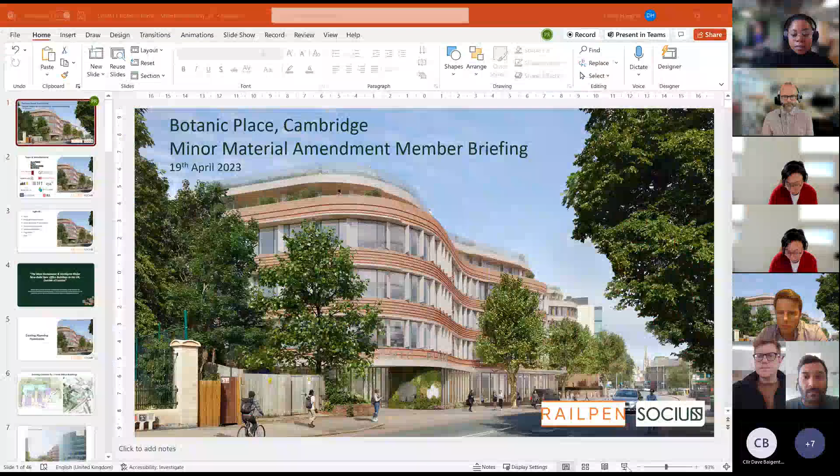Many thanks. This is to run through our proposed minor material amendment for the existing consent on Botanic Place. So here's the team.

We've obviously had a few introductions, you'll recognise a lot of the names there. Just to set the scene, Railpen acquired the site from Pace Investments in about September last year, so they're the investor going forward for this scheme, and as you might be aware, they are a pension fund.

They are here for the long term, so there's the justification for investment in good quality materials that stand the test of time, creation of a wonderful long-term sustainable community, and buildings that operate efficiently, because this is an asset for Railpen for the long term, for the income for their pension funds. And as I said earlier, Socius were appointed as their development manager to deliver this.

So just a recap on the existing planning permission. It's consent to retain the Flying Pig pub, illustrated on Hills Road, with a private garden, and essentially two new office buildings, Building B and Building C, alongside Building A, Botanic House, the existing Mills and Reeve building that's about 12 years old. That's staying very much as it is. The development site is here to the south of Botanic House, with a double basement and substantial car parking. You can see the ramp on the left-hand side, and a 3D stack there.

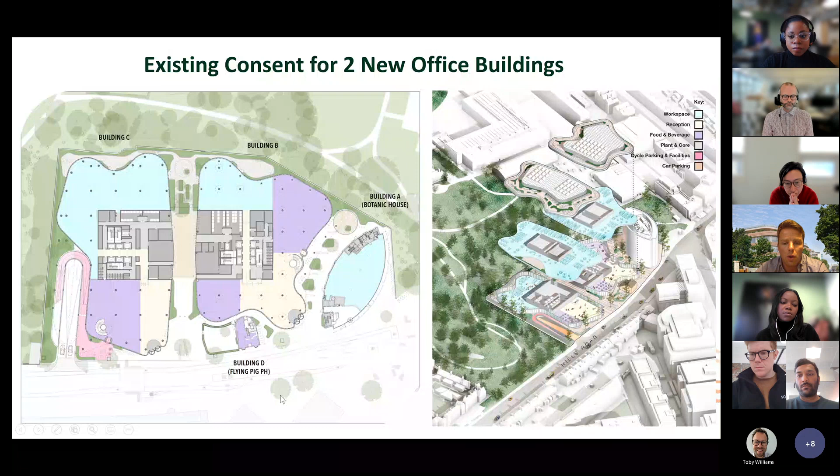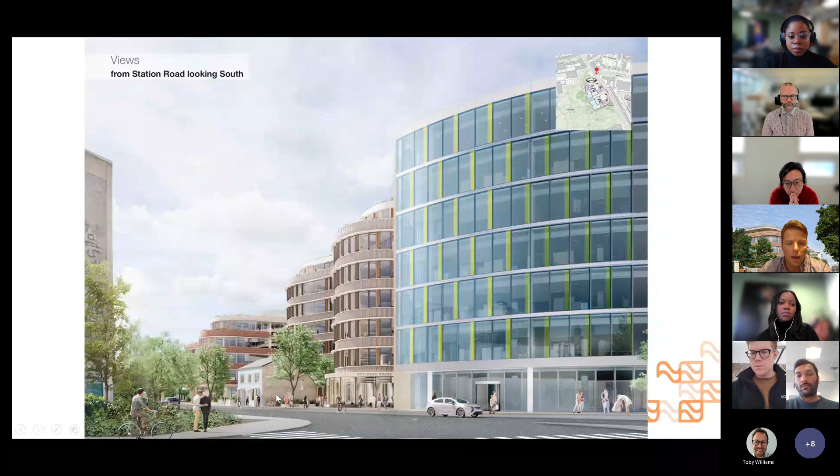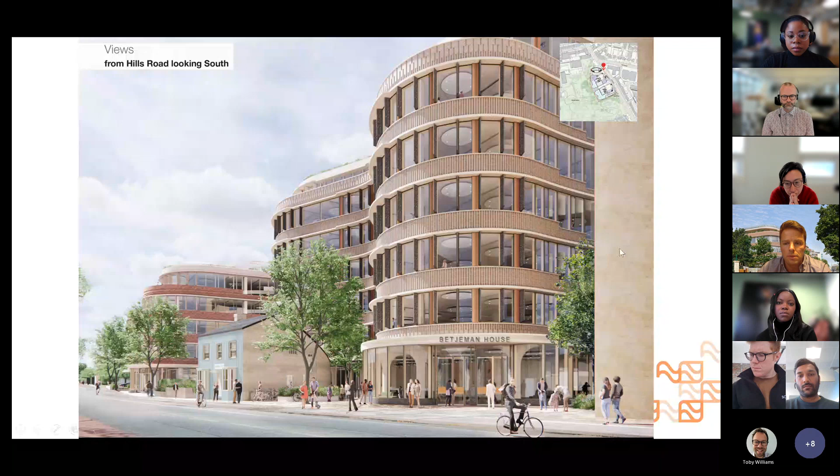These are some old images you might recall from the existing consent. This is looking from the top of Station Road, showing the existing Botanic House and Mills and Reeve in it. You can see the retained Flying Pig in the foreground with Building B and Building C. Zooming in a little more for a closer view, just glimpsing Botanic House on the right-hand side. This is a view looking south down Hills Road, showing the southeast corner of Building C.

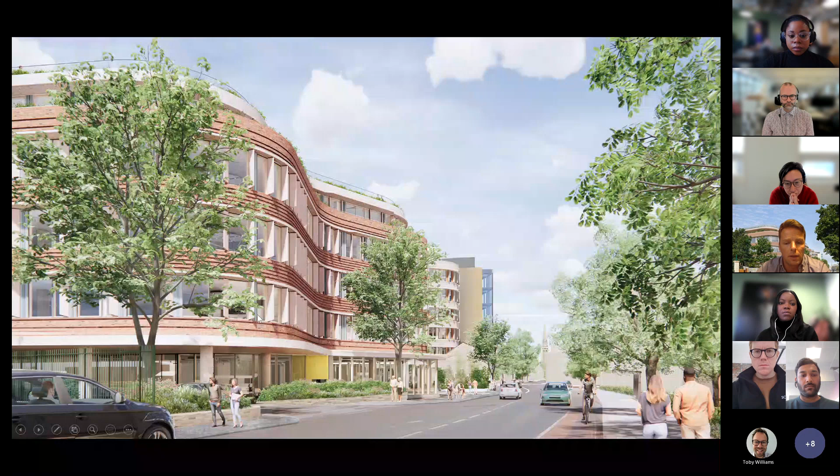Moving on to the scope of our minor material amendment, or Section 73 application - what are the proposed changes? We've made a 3D model where the grayed out areas remain as per the existing consent, and we've highlighted only the areas we're proposing to amend. Predominantly that's the basement, which we're reducing - I'll come on to that in more detail - a few tweaks to the ground floor layouts and public realm, an even smaller tweak to the roof levels, and we're proposing a single phase instead of a two-phase build program.

So what areas are not being affected? Well, everything else really. The Flying Pig, obviously we're retaining that as per the existing consent. We've got consented building heights and massing, their footprints and facades all remaining as per the existing permission. And we can also demonstrate there's no impact on the key views, which I'll come on to later.

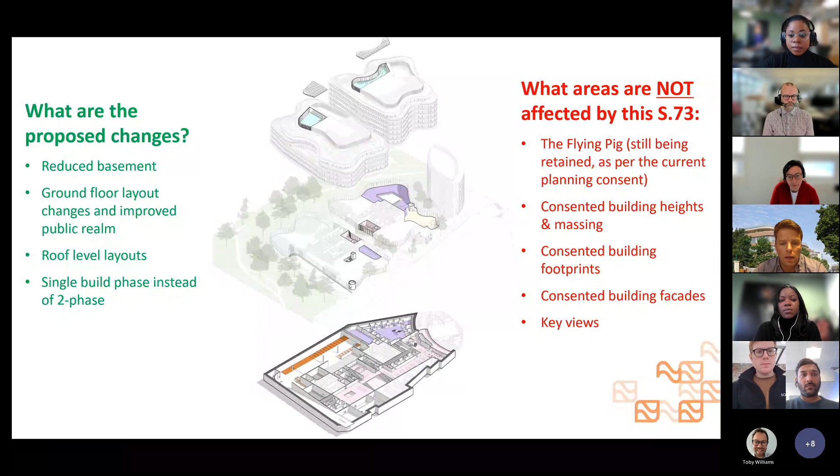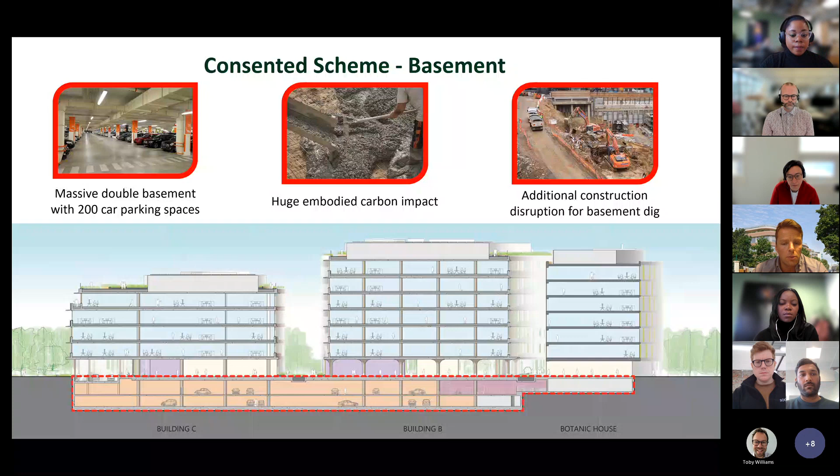Starting with the basement - the existing consent has a huge double basement, 200 car parking spaces down there, a massive embodied carbon footprint, and a huge dig, which has an impact on construction program and disruption for local communities and roads, which we'd like to improve. How are we improving that? Well, we're going to reduce it significantly - around 10,000 cubic meters of dig being saved.

It's not quite halving the volume of the basement, mostly because we're relocating the servicing down there. By having the servicing, refuse vehicles and all the rest going into the basement, there are huge benefits to the public realm, the enjoyment of that space, and the pedestrian arrival experience. Unfortunately, because we've got some rather large refuse lorries that have to go down there, the basement does have to be fairly deep, so we've effectively got a sort of half floor in there. But there are significant savings in terms of embodied carbon.

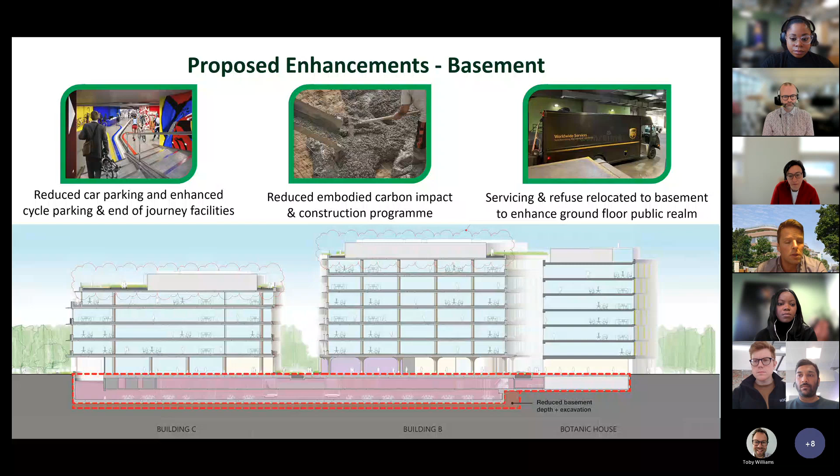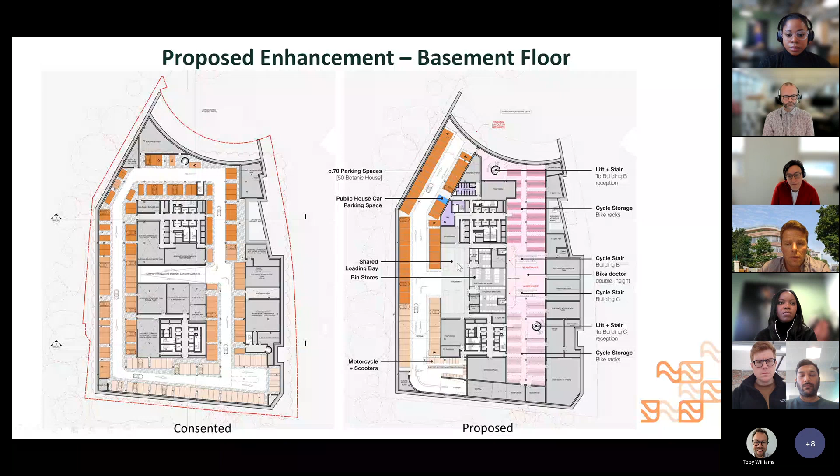We're reducing the car parking from about 200 spaces down to about 70 spaces, and as a result, we're enhancing not just the quantum but the quality of the cycle parking and end of journey facilities. This is a basement floor plan - you can see the consented scheme on the left-hand side, the lower basement level, with all the car parking highlighted in orange, and our proposed basement on the right-hand side, again with the car parking shown in orange - only about 70 spaces. Then there's bicycle parking and end of journey facilities - I'll come on to more detail about the arrival experience - and effectively the rest is servicing, bins and plant predominantly.

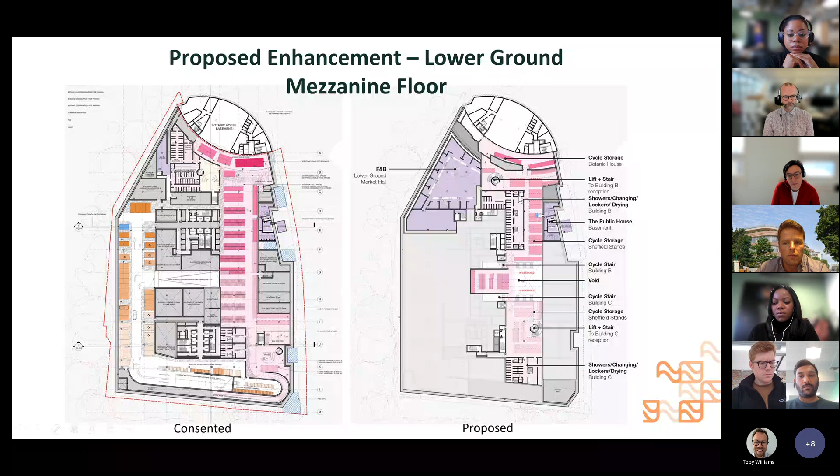Going up one level, this is the upper level of basement in the existing planning permission, where you can see bicycle parking in pink and some additional car parking in orange. This is effectively our lower mezzanine level in our reduced basement, with extensive bicycle parking and end of journey facilities, all in pink, and a bit of F&B space on the lower ground, which will benefit from natural light by virtue of a void introduced on the ground floor.

In terms of 3D, the bicycle parking has been a huge focus here. The existing consent had what was acknowledged to be a rather dangerous bicycle ramp that curved around the vehicle ramp. It was a single point of entry, and not ideal. So what we're doing is putting bicycle parking front and center of the scheme.

Slap bang in the middle between building B and building C, there are two dedicated entrances with their own bicycle friendly stairs and ramps, and also their own bicycle friendly lifts, one per building. That has huge improvements in terms of user experience and security.

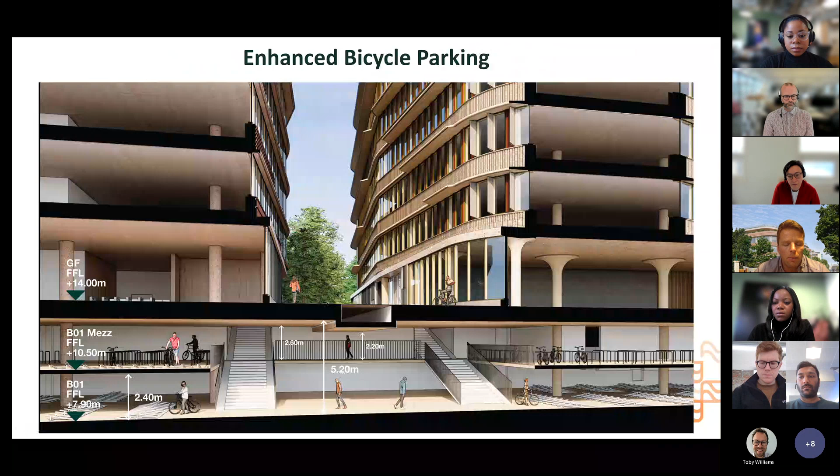You can see how it allows for this extra volume in double height space, where we're proposing a bike doctor. This is a visualization of what that might look like.

We are also looking at how these ramps might deliver some assistance for heavier bikes, for people taking them up the stairs, but they're going to be a very gentle incline. We're designing them so that both the ramps and the stairs will be very bicycle friendly, with input from our specialists at 5 at Heart. That would deliver a really outstanding cyclist experience.

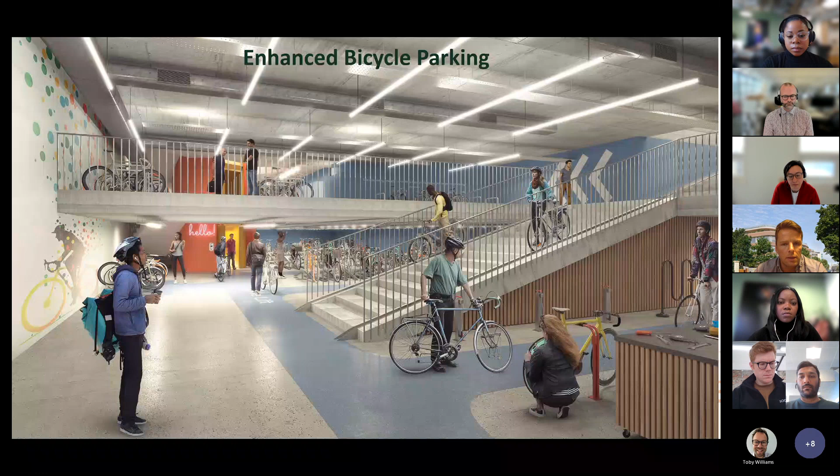Moving up to the ground floor and the public realm. As before, we've got the consented scheme on the left-hand side and the proposed enhancements on the right-hand side. You can see the dedicated entrances there for cyclists off that central space.

You can see some additional planting and trees to reflect the fact we're not pulling service vehicles into this space now. The blue here is office space, the purple is F&B and retail, and the yellowish space is our reception areas.

You can see how we're consolidating a lot of the F&B into building B, and there's a reduced reception area. Still a bit of co-working space, but no significant changes there.

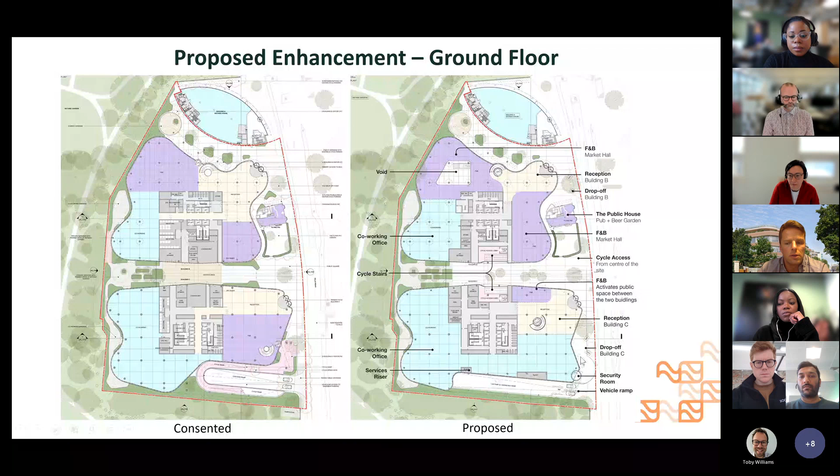You can just see a slight change to the vehicle ramp in that southeast corner, and the introduction of a new security office that would provide additional security and oversight of the vehicle ramp.

In terms of the market hall and F&B space we're looking at in building B, we are already engaging with a number of really exciting operators for this space, as we see a sort of market hall or food hall offer.

That has lots of exciting, interesting food stalls and kitchens offering a range of different cuisines, craft beers and spirits, but it also can offer lots of different events and activities, everything from live music, yoga, wonderful events for local schools, and it becomes a very democratic, open, flexible space.

Exactly like you can see here in the Seven Dials Market in London, where anyone can come along and sit down. You can't reserve a table, and you make friends, socialise, and grab something to eat from one of the many food stalls there.

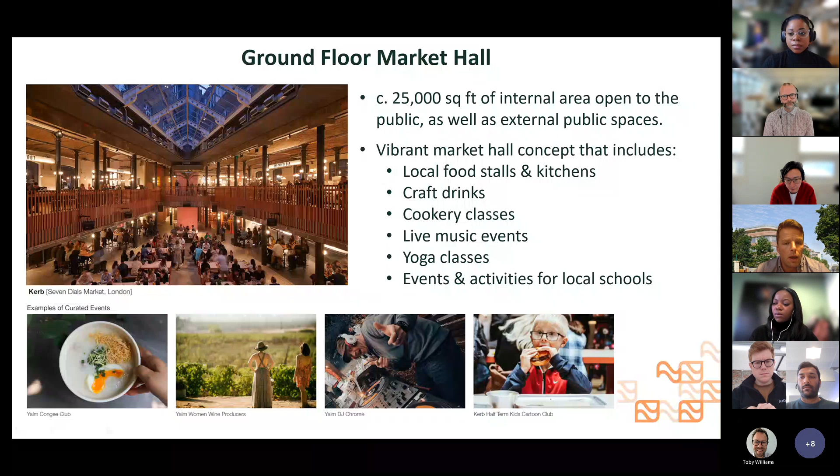It's a really exciting, vibrant space that is open to the public, totaling about 25,000 square feet at the moment. That's in addition to all the wonderful new public realm that we'll be delivering.

In terms of the public realm, these are the enhancements we're looking at. I've already mentioned the trees and that central space between buildings B and C, now that we're not pulling service vehicles into this area, along with the enhanced cyclist arrival experience. We've got some additional greening on the southeast corner, which I'll come on to in a bit more detail.

We're looking at how we can further enhance the proposed new trees fronting Hills Road to deliver larger, more impressive trees such as London Planes. These are just some images of what that might look like.

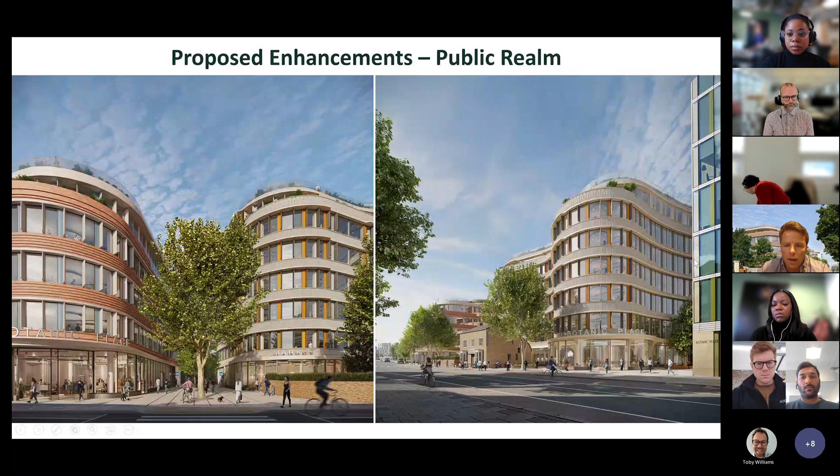So this is an image focusing on that central space with a rather impressive London Plane tree in the foreground, building B on the right and building C on the left. And this view gives just a glimpse of Botanic House on the right-hand side, with the Flying Pig in the foreground.

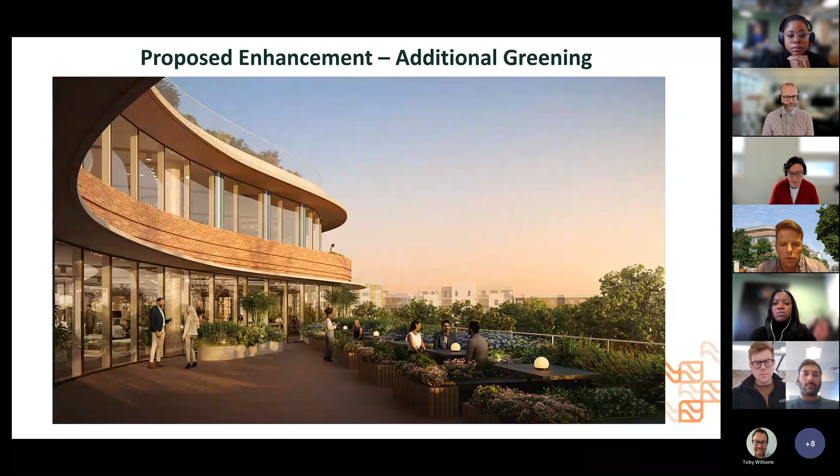These are some views of the terraces, because there is substantial greening and wonderful planting at the terrace levels as well, to help enhance the overall greening of the site and the biodiversity, and really trying to encourage the users of those buildings to make good use and enjoy those outdoor spaces.

I mentioned the new green wall that we're proposing. On this southeast corner, which is a very prominent corner as you approach from the south along Hills Road, we think it's an excellent location for a living green wall, and we make quite a nice feature there, at an important arrival point for a lot of pedestrians, cyclists, and vehicles who might be parking there.

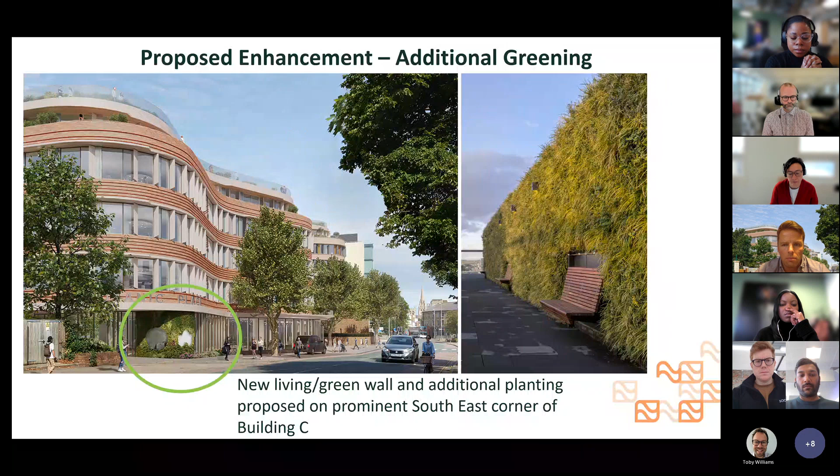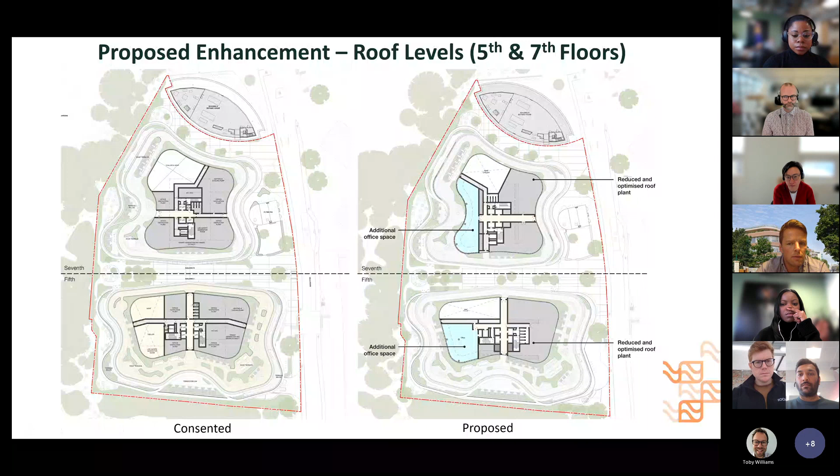Going up to the roof levels, this is the consent on the left-hand side with the 7th floor of building B and the 5th floor of building C illustrated below, because we've got those different heights. You can see there's a straight swap, we managed to consolidate a bit of that roof plant, and we're just looking at a bit of office space within the same volume and massing of the existing buildings.

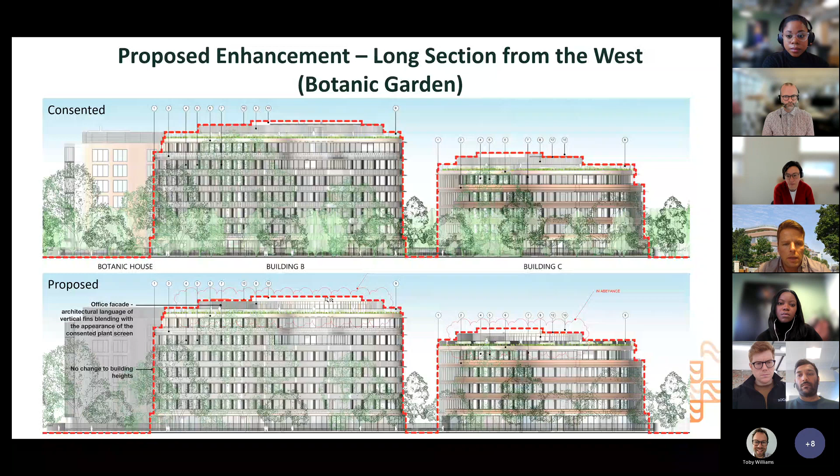So what does that look like in terms of sections? You can see here this is the long section from the west, from Botanic Garden. The consented scheme is at the top there, with plant at the moment, and then our proposed section here where you can see a bit of an introduction of the offices, trying to introduce a similar facade design, so as not to be seen as a radical departure from the existing consent. Importantly, it's all within the existing volume, so there's no change in building height or massing, and we can also illustrate that in the verified views.

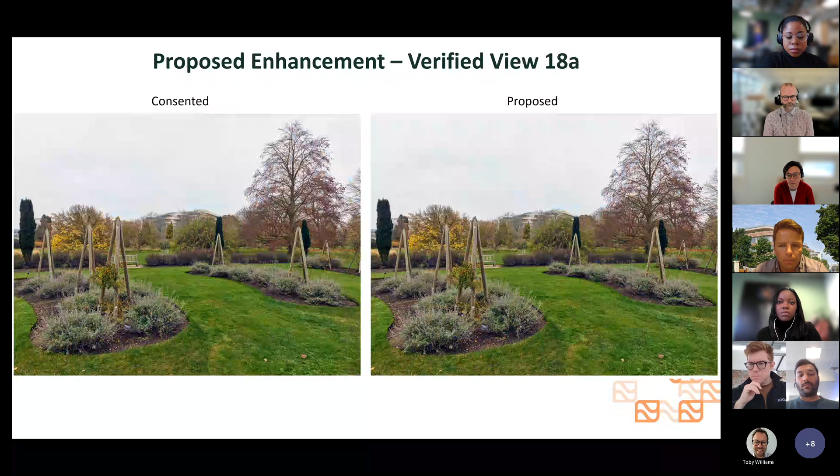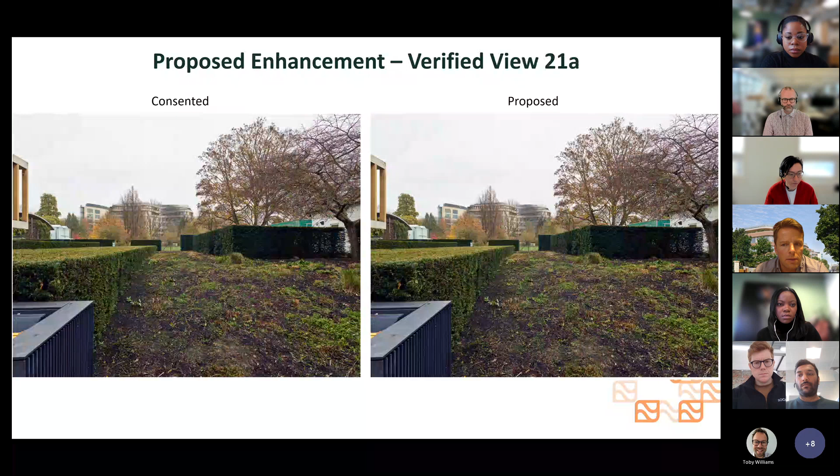So these are the same verified views from the original planning application that was consented. It's a bit of a case of spot the difference here, but you can see there's no impact, with the consented scheme on the left and the proposed scheme on the right. Again, this is another verified view, 18A, consented on the left, proposed on the right. And lastly, one more, this is 21A, again just illustrating that there's no impact on these important views.

In terms of phasing, the existing consent allowed for a two-phase approach, two-phase build. So building B was built, and then once that was completed, construction would start on building C. So looking at an extensive build program, given where we are today, we'll be looking at delivery in sort of late 2028.

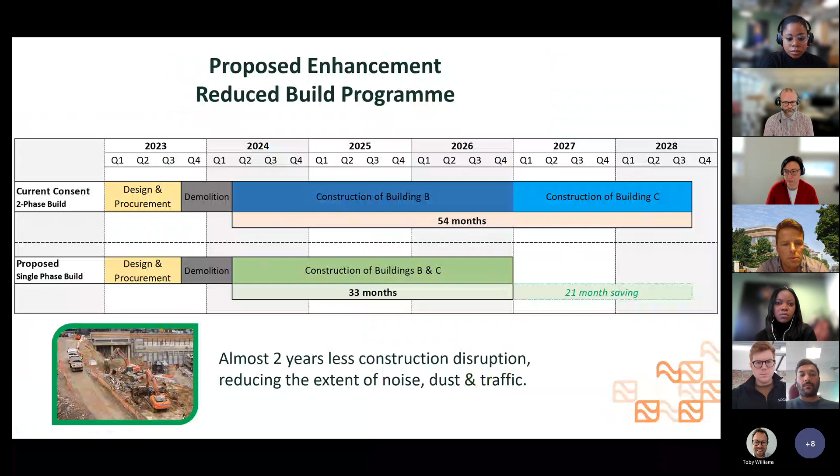As opposed to the existing consent, what we're proposing is a single phase approach, so both buildings are delivered together. That allows us to compress the build program significantly to about 33 months, so almost a 2-year saving on the build program, and significantly less disruption to the local community and roads.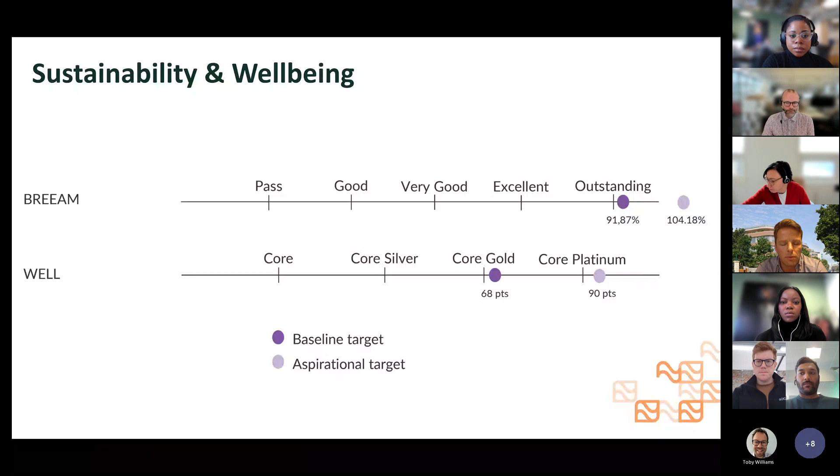For BREEAM, you can see in terms of the baseline, the dark purple, we're easily achieving outstanding, but there are some additional credits, largely attributable to innovation, that might enable us to go even further. We're extremely strong on that. Again, comfortably achieving gold, but we're looking at how we can achieve platinum to deliver wonderful buildings that really look after people's health and well-being.

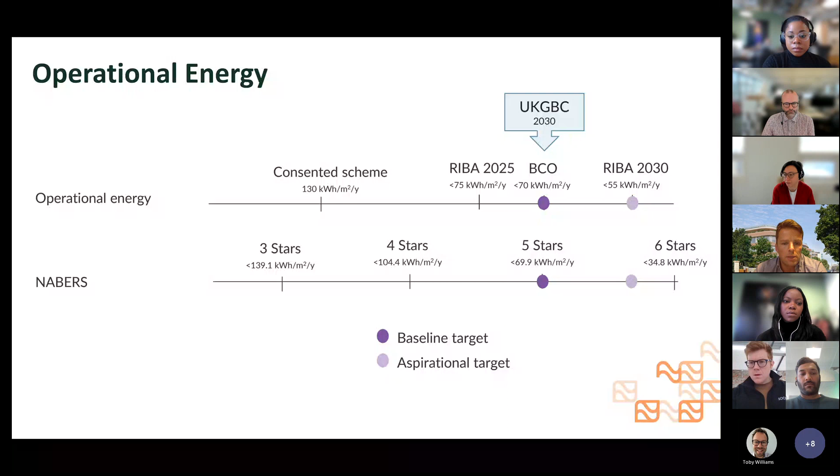As mentioned, huge focus on operational energy. This compares the consented scheme, business as usual, versus where we're targeting in terms of UK GBC targets. Baseline there in purple, comfortably achieving NABERS 5-star and UK GBC 2030 targets. But aspirationally we're looking at how we could go further, by looking at the ventilation strategy, the cooling, the efficiencies of the facades, reducing solar heat gain — all being explored extensively at the moment.

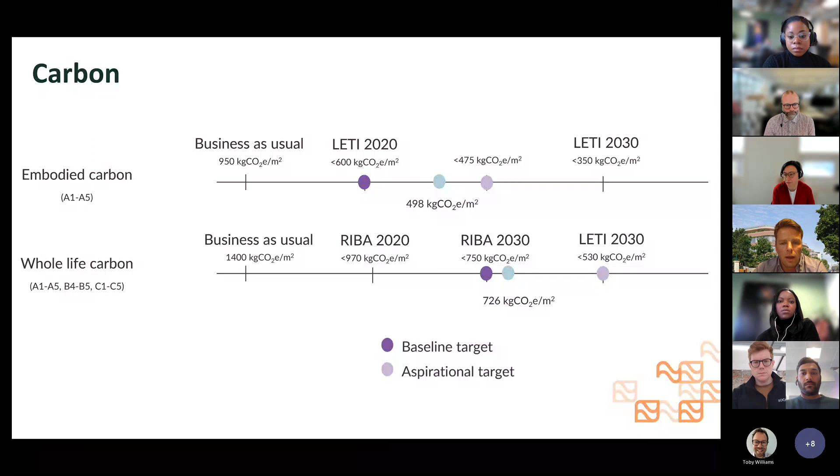In terms of embodied carbon, we've got embodied carbon on top and whole life carbon on the bottom, looking at where we sit relative to LETI targets and RIBA targets. This is very early stages, still conducting this modelling, but we're feeling confident we're on target to achieve at least RIBA 2030 and go beyond. We're looking at fairly traditional materials here, but there are all sorts of innovative ways of delivering that significantly reduce the carbon impact of construction.

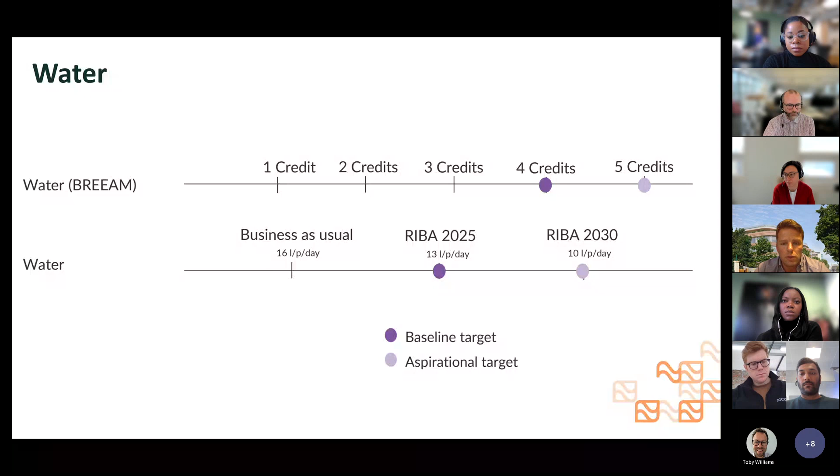In terms of water, this is obviously a very hot topic in Cambridge at the moment. Business as usual is 16 litres per person per day. Our baseline is reducing that to 13, but we'd like to see how we can reduce that further to 10 litres. In terms of BREEAM, we're scoring outstanding credits there because we've got the blue roofs, rainwater harvesting, and grey water harvesting and recycling as well, really reducing water consumption.

In terms of program, we're looking at submission of the Section 73 application at the end of this month, and we'll be getting vacant possession of the site around October this year, at which point we'd look to commence a demolition contract. On the assumption of a single phase approach, we're looking at completion of the build by the end of 2026. Thank you very much.

Yes, please, Toby. Go for it, Dave. Hello? Yes, please. Do you want to ask a question, Dave? Sorry, Dave, can you hear me? Do you want to ask a question? Sorry, I had a minor blip.

My question's really about how you're going to do all this without disrupting the traffic in Cambridge. I should be aware, but I'm not quite aware of a transport plan. This is a major route into Cambridge at a time when potentially the County Council will be making massive moves to reduce the flow of cars through Cambridge and increase the speed of buses. You're going to be moving a lot of soil, a lot of debris — I just wondered what the plan is.

Yeah, so we will be submitting a construction management plan with the Section 73 application, working on the assumption of a single phase approach, reducing the construction program by 21 months versus the existing consent — already a significant improvement. We're looking at all opportunities in terms of modern methods of construction to deliver prefabricated, offsite materials, such as the facades, which could be fabricated offsite, reducing disruption and vehicle movements. We'll submit that as part of the Section 73, setting out the detail of the proposed vehicle movements.

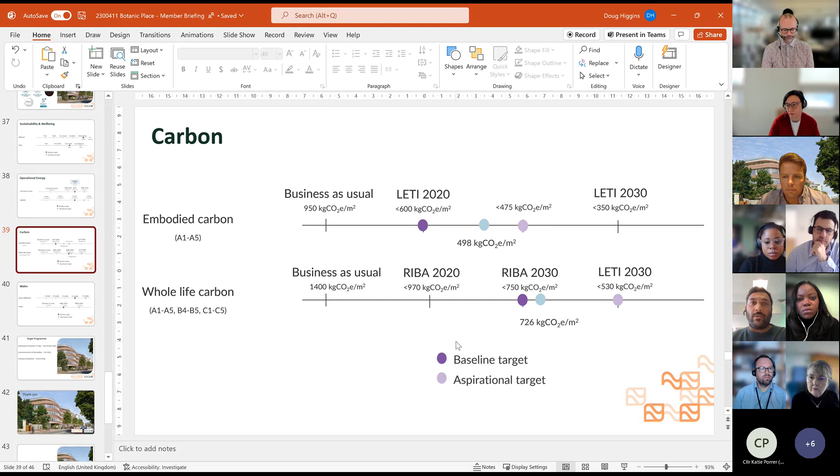I'll explain that bit. The blue marker shows where, as Doug explained, we're still in the process of refining and developing the analysis we're doing. So the blue marker shows where we currently are between our baseline and aspirational, and we're looking to push that further and further to the right on this image. So that's what the blue marker represents.

Hopefully that's covered everything, Jenny. The work on the water - how you'd get from 13 to 10 litres.

Yes, again, that all comes down to the future design and modelling and coordination that will be undertaken over the course of the six months. But we've got a very firm baseline there, and I think once we're closer to actually placing a build contract towards the end of this year, we'll have a much firmer idea of what we're actually able to deliver. We've set out a proposed strategy in terms of the grey water recycling and the rainwater harvesting and the blue roofs in terms of the volume of those tanks and how they're going to harvest and recycle that water. It's now just about the detail as to the precise volumes of water that are used and moved around the building to gauge future demand.

Okay, has that answered all your questions, Jenny? I think Jenny may have frozen up. I'll assume that it has.

So, Katie Porrer, you have some questions. Yeah, thank you very much for the presentation.

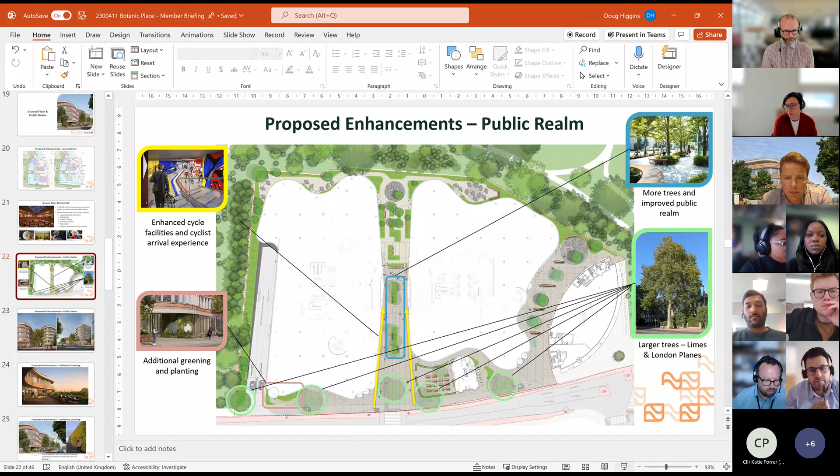I completely agree, Katie. Let me share my screen again to bring up that slide. You can see hopefully in the bottom middle we're proposing a slight relocation of the consented toucan crossing, so that it now aligns with what we see as the main arrival point from people arriving from the east, from Station Road. That's moved slightly further north from where it was, just to align so it's better for cyclists, better for pedestrians. We think it aligns nicely with a central pedestrian way between buildings B and C, and that will also form part of our application. We're also considering running a fun design competition to see how that can be a slightly more interesting toucan crossing rather than just black and white stripes. There are various precedents around the country introducing more colourful, artistic, creative crossings that deliver the same function, allowing pedestrians and cyclists to cross safely, but it might add a bit of colour and vibrancy and interest there. It could be a fun exercise we'd want to explore. Hopefully that's what you were looking for.